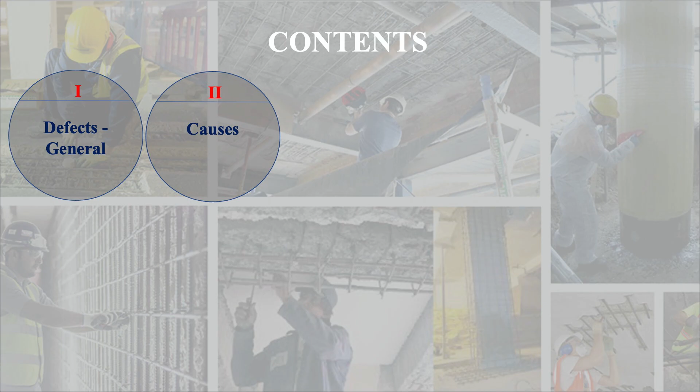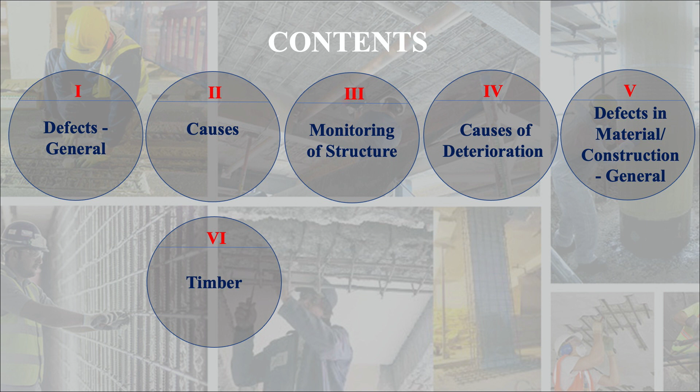The content of today's discussion includes defects in general, then causes of defects, then monitoring of structures, then causes of deterioration, then defects in material and construction in general. We will discuss about timber, and finally we will discuss about defects in iron and steel.

Learning outcomes of this module are: after going through this lecture, you must be able to identify defects in general in building construction, also to describe the defects of timber, and you should be able to describe the defects of steel. So let us begin with the introduction of defects and the remedial measures.

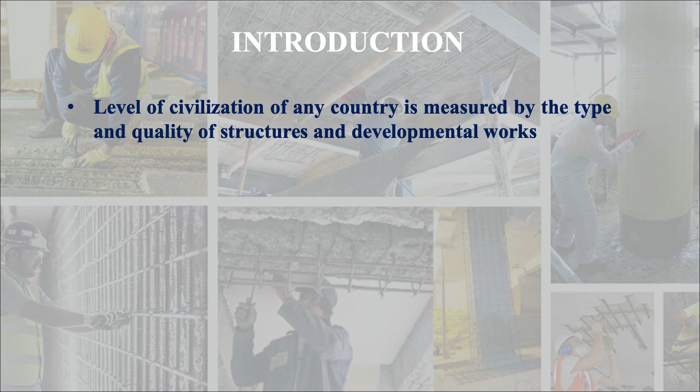The level of civilization of any country is measured by the type and quality of structures and developmental works put up there. The construction activity is mainly in the hands of civil engineers to build structures without flaws. It should be your determination to ensure defect-free construction.

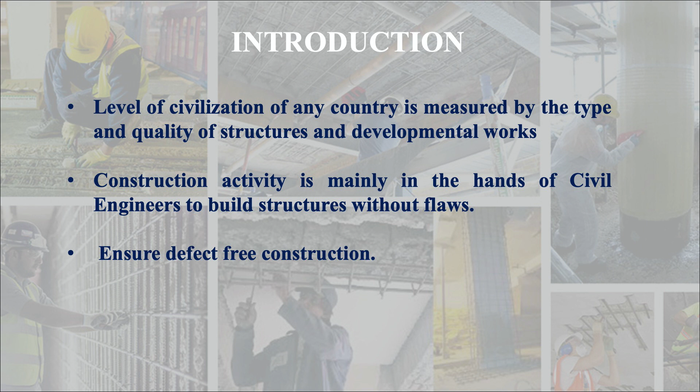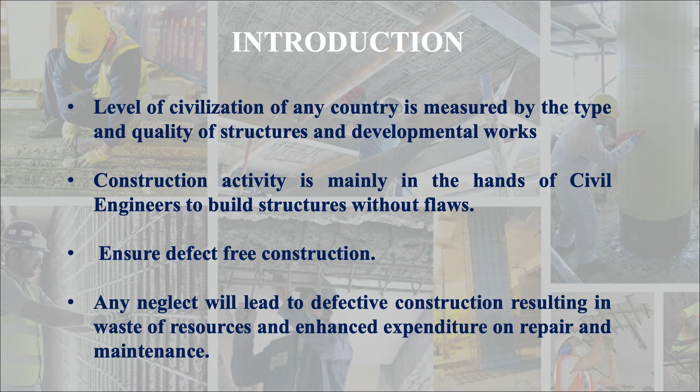Any neglect will lead to defective construction, resulting in waste of resources as well as enhanced expenditure on repair and maintenance. Because if defective construction is done, then it will require huge amount for their repair and maintenance.

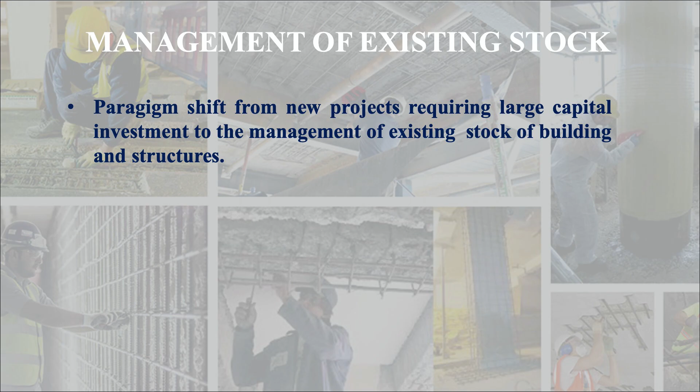Then how we should manage our existing stock? There is a paradigm shift from new projects requiring large capital investment to the management of existing stock of buildings and structures. In that sense, the recession has come as a blessing to establish the importance of management tasks of inspection, assessment, maintenance and repair.

Because if these four management tasks are done properly, then we can have a good quality of construction, as well as we can repair and maintain buildings for a longer life of the structure.

What are these four? These are: inspection, meaning the structures or buildings have to be inspected frequently, whether there is any damage or deterioration of the building. Then we have to assess what deterioration or damage has been done to the structure, then how we can maintain it and how we can repair it. So these are the four important management tasks.

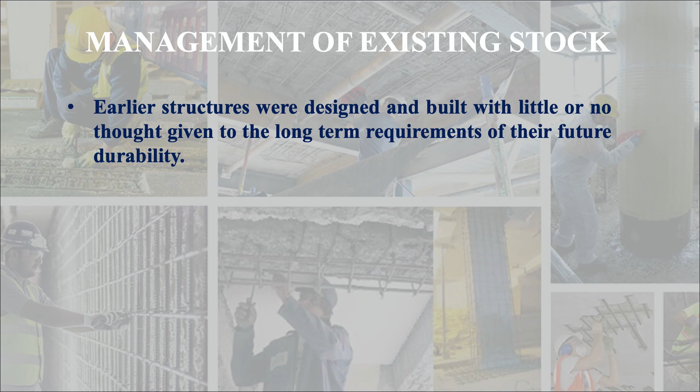Earlier, generally structures were designed and built with little or no thought given to the long-term requirement of their future durability. Meaning either we were focused for a short period that we have to construct a building or a structure, but how durable it will be for a long future use, it was not considered generally.

Now the view has changed and construction management is given the prominence it deserves. Because by following the principles of construction management, we can construct a good quality infrastructure with less cost, with less time, and overall expenditure certainly will be within a certain limit or range. Meaning the construction will be economical.

And when the quality is good, you need not to go for frequent repairs. So that way also we will be saving on cost.

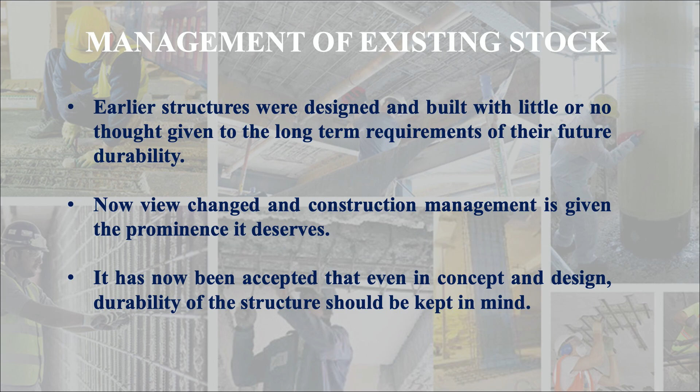It has now been accepted that even in concept and design, durability of structure should be kept in mind. Meaning that durability is not a factor which has to be considered at the time of construction only. When you are planning a building, when you are designing a building, durability should be taken into consideration at that time also. Whether the concept and plan of a building is durable, whether the design will lead to a durable structure, these have to be considered.

Now, construction management is the framework necessary to ensure a rational overall quality of any structure from conception to the end of its nominal life and beyond. So you can see from that what is the role and importance of construction management, that it is basically responsible for overall quality of any structure since conception to the end of its nominal life. So that way construction management is a very important aspect in construction.

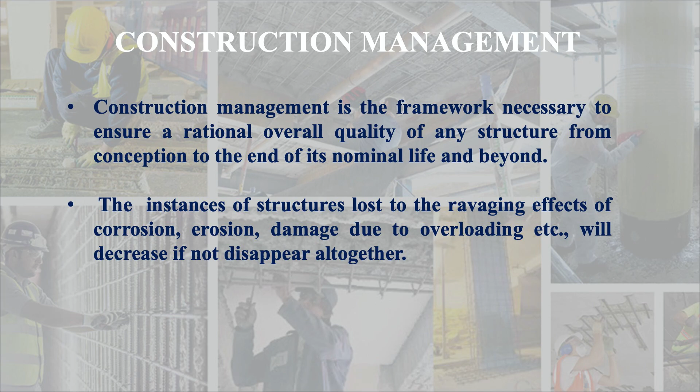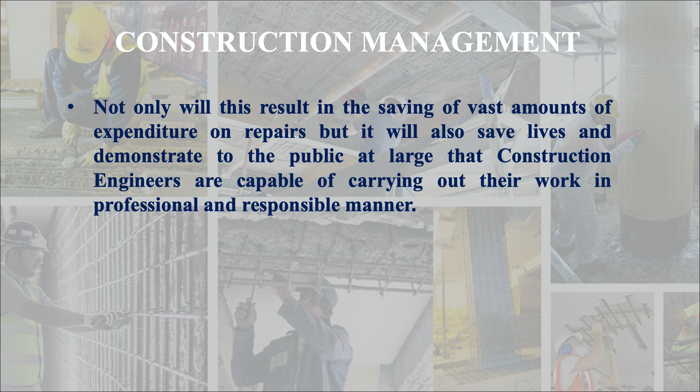The instances of structures lost to the ravaging effects of corrosion, erosion, damage due to overloading, etc. will decrease if not disappear altogether, if we follow the principles of construction management. Not only will this result in the saving of vast amounts of expenditure on repairs, but it will also save lives and demonstrate to the public at large that construction engineers are capable of carrying out their work in a professional and responsible manner. So that is the importance of following the principles of construction.

We move to inspection, assessment, maintenance and repair. These four words I told you earlier.

So the aim is to avoid defects in the entire construction process, starting from planning to the end of the life of the structure. For that, we have to follow these four steps religiously. During this discussion, you will come to know about possible defects at all stages of the construction program, the causes that give rise to the defects, and also appropriate ways for carrying out repairs.

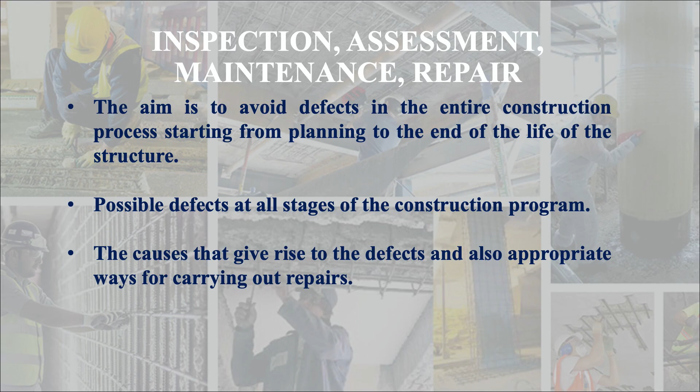Now let us begin with assessment of present condition, that is, how we can assess the present condition of the building.

Inspection and condition assessment are now well practiced sciences, but strength assessment based on design philosophy and theory has shown in many cases to underestimate the real strength of a structure, and greater understanding is essential in this area to ensure that structures are not condemned unnecessarily. Sometimes a wrong assessment will lead to condemning a strong or healthy building unnecessarily, which is an economic loss.

Assessment techniques applied in the field to determine actual working stresses also need development, not only to test our theories but also to ensure that realistic estimates are made of the future useful life of the structure. Sound strengthening techniques need to be developed and implemented in an economical manner.

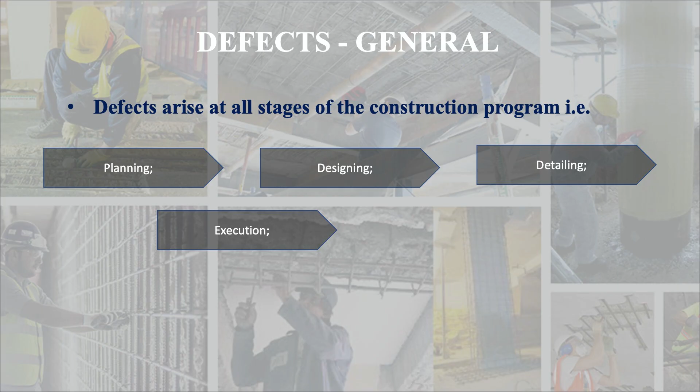Now let's see what are defects and at what stages these defects come into the building. Defects arise at all stages of the construction program, that is, planning, designing, detailing, execution and maintenance. So at all stages, defects may creep into our structure if we are not careful.

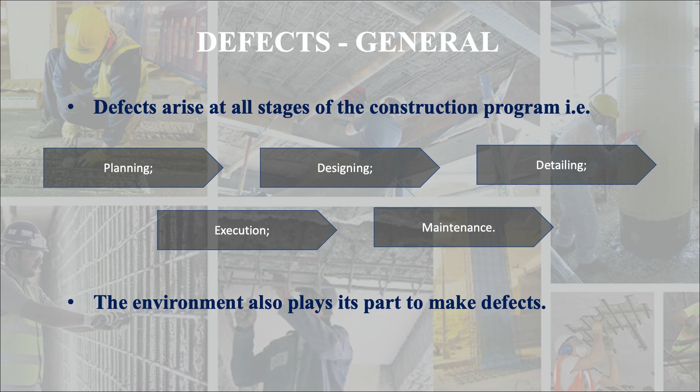The environment also plays its part in making defects. Now, these structures which we have built are exposed to environmental agents, and these environmental agents, when they act on the structures, cause defects in the building itself and in the building material.

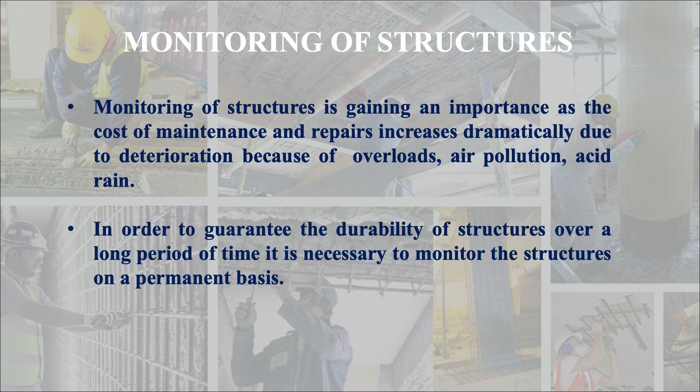Now, monitoring of structures is gaining importance as the cost of maintenance and repairs increases dramatically due to deterioration because of overloads, air pollution, acid rain, etc. In order to guarantee the durability of structures over a long period of time, it is necessary to monitor the structures on a permanent basis.

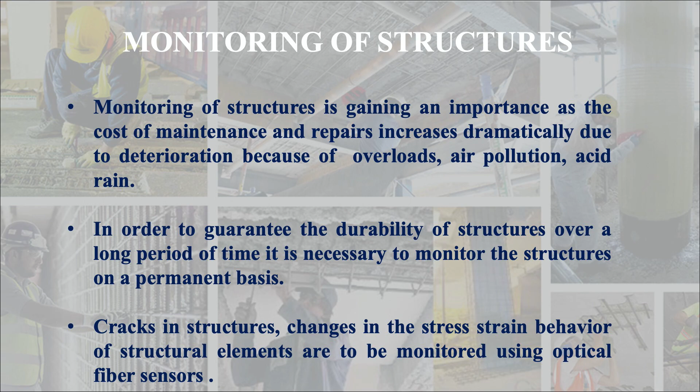Monitoring is a very important aspect. Cracks in structures, changes in stress-strain behavior of structural elements are to be monitored using optical fiber sensors. This is one method or technique to monitor cracks in the structure and changes in stress-strain behavior of structural elements, so that we can monitor the behavior of the structure over the period of time.

Now there are various tests to find the remaining strength and also the defects in the structure. One of the methods is non-destructive tests. As is clear from the name, we are not going to demolish or damage any part of the structure, and without disturbing any element of the structure, we carry out these tests. That's why it is called non-destructive testing.

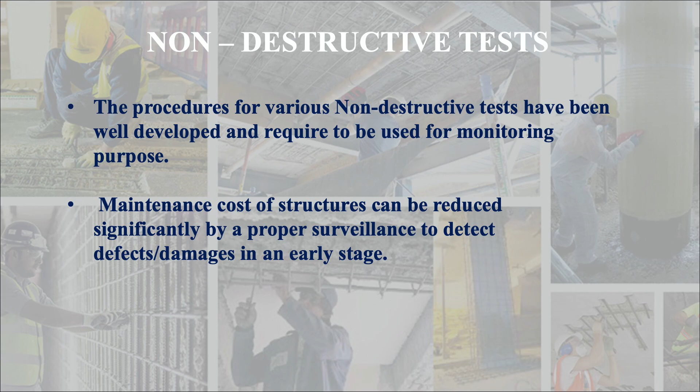So the procedures for various non-destructive tests have been well developed and are required to be used for monitoring purposes. The maintenance cost of structures can be reduced significantly by proper surveillance to detect defects or damages at an early stage. If by way of proper monitoring we can detect any defect or damage at an early stage, then we can deal with it and fix that damage or defect easily and with less cost.

Because at a later stage, the cost will go on increasing, and at that time the money spent will be too much, or this may also lead to a situation where it is not repairable and we have to remove that structural element or some part of the structure to save the rest of the structure and strengthen it. By removing it, we mean not only removing, but constructing a new strong element in place of the weak element.

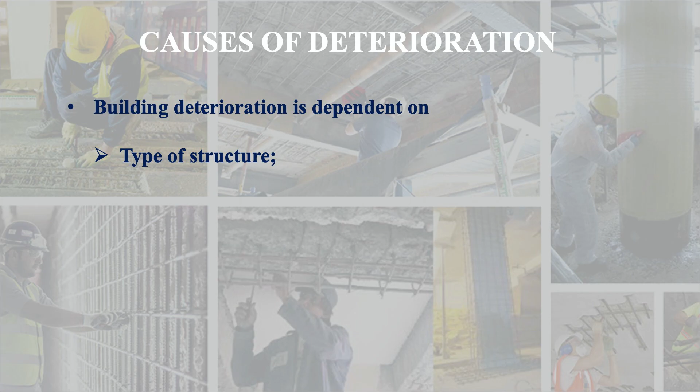Now, causes of deterioration. Building deterioration depends first on the type of structure, how it was designed and detailed, that is, the design and detailing of the structure, then how it was constructed, meaning the construction method and techniques, then how it was maintained over a period of time, whether any maintenance work was done or not.

If maintenance was done, then what material and what methods were used. Then its environment, in which environment that building is located, whether it is exposed to some acidic gases or acidic environment, whether there is a lot of rain, or whether temperature variation is too much, because all these things affect the buildings.

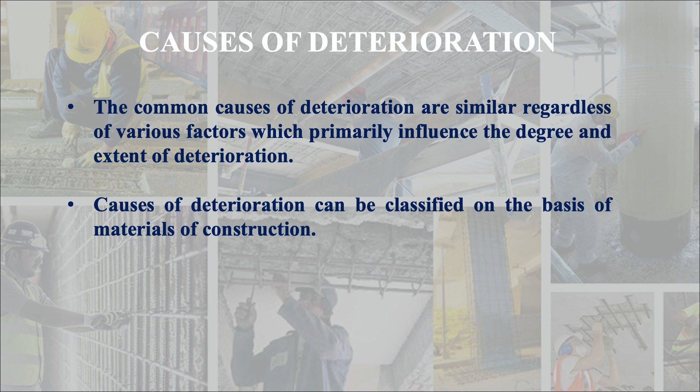The common causes of deterioration are similar regardless of various factors which primarily influence the degree and extent of deterioration. Causes of deterioration can be classified on the basis of materials of construction. So let us begin with the material timber.

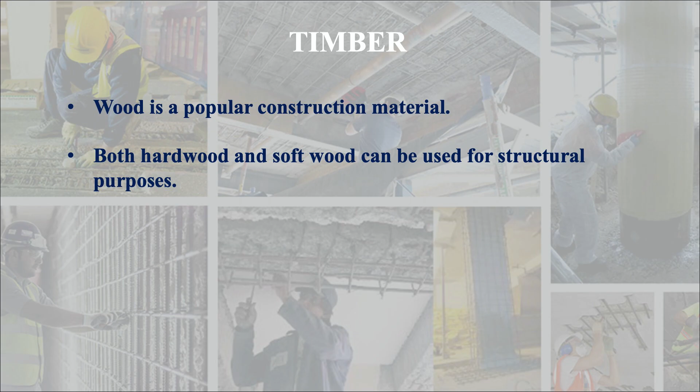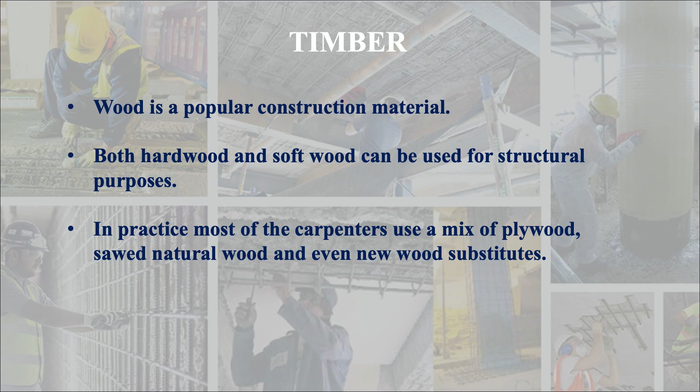Wood is a popular construction material. Both hardwood and softwood can be used for structural purposes. In practice, most of today's carpenters use a mix of plywood, sawed natural wood, and even new wood substitutes which are available in the market. Means there are certain substitutes, wood substitutes, which can be used in place of natural wood.

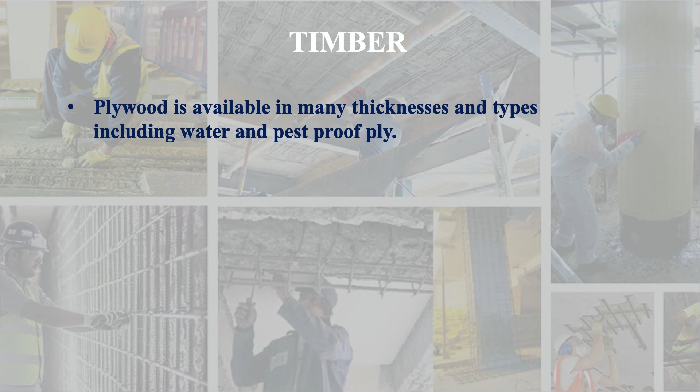Plywood is available in many thicknesses and types, including water and pest proof ply, meaning the ply which shows no effect when exposed to water or pest attack. Along with ply, you could use laminates like Formica, Sunmica, or wood veneer, which has the finish of a natural wood.

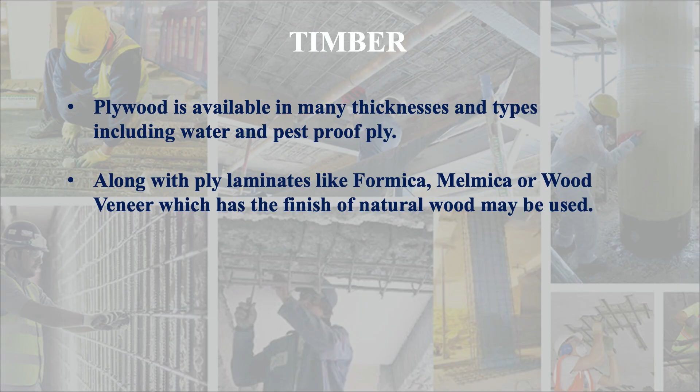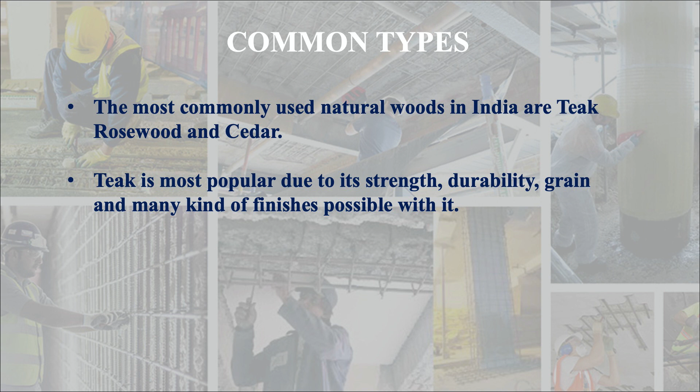Now, what are the common types of timber used in structures? The most commonly used natural wood in India are teak, rosewood and cedar. Teak is most popular due to its strength, durability, grain and the many kinds of finishes possible with it. These are the advantages why teak is preferred.

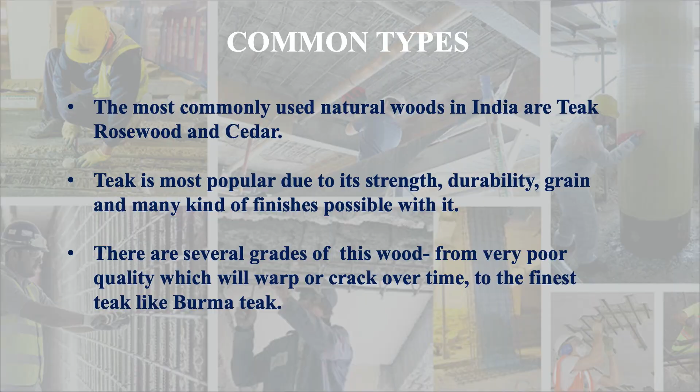But when buying teak, you should know that there are several grades of this wood, from very poor quality which will warp or crack over time, meaning these defects may come into the picture, to the finest teak like Burma teak. There are a variety of teaks.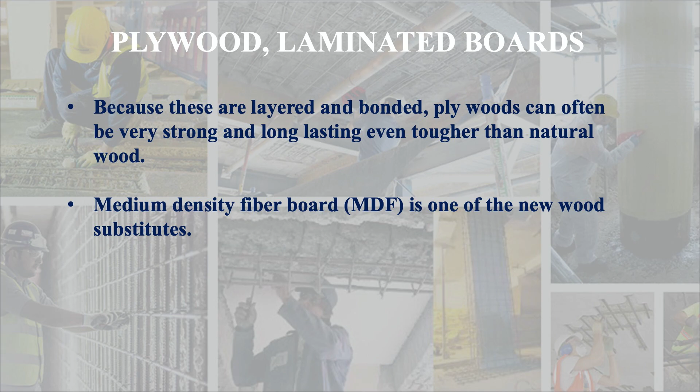Medium density fiber board, generally called MDF, is one of the new wood substitutes. For the home, it can be used for doors, windows, even for paneling, floors and ceilings. An exterior grade variety of MDF is designed to withstand humidity. You can even get MDF with lamination on one side or both.

Wood substitutes can have many plus points. What are these plus points? It is durable, and it is fire, termite, moisture and sound resistant. So these are the advantages.

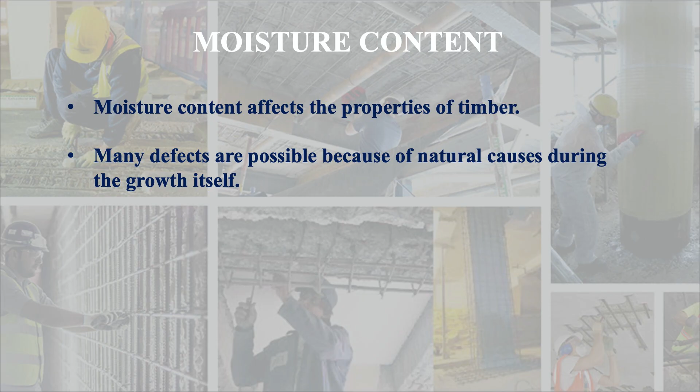Now let us see how moisture content affects the properties of timber. Many defects are possible because of natural causes during the growth itself, meaning when the tree is growing, some defects may come into the picture at that time also.

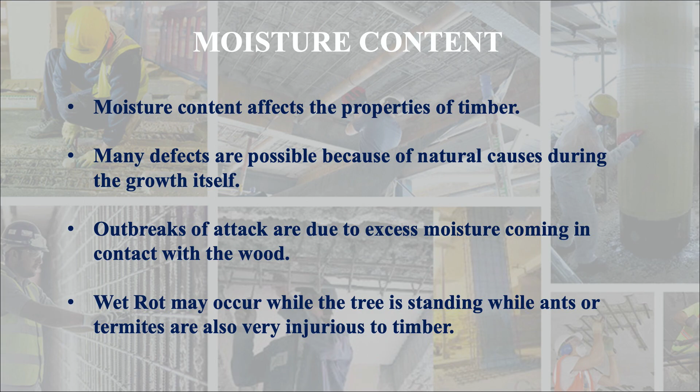Outbreaks of attacks are nearly always due to excess moisture coming in contact with the wood, causing lot many problems. One such problem is wet rot, which may occur while the tree is standing, while ants or termites are also very injurious to the timber.

In addition to wet rot, these are also injurious to the timber. Teak, sal and deodar withstand the attack of white ants. Now, what can we do to deal with the moisture? The answer is seasoning. Seasoning is limiting the moisture content.

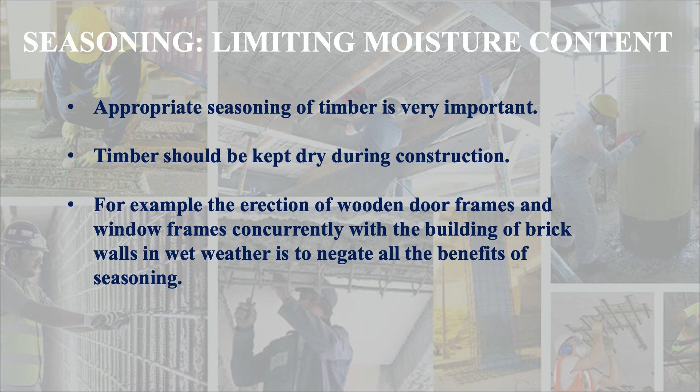So, appropriate seasoning is very important to make the timber strong. Timber should be kept dry during construction. For example, the erection of wood door frames and window frames concurrently with the building of brick walls in wet weather negates all the benefits of seasoning. Means if you are doing this work concurrently, especially in wet weather, the seasoning of the timber will be affected.

The construction should be such as to protect the timber from damp during the life of the building. All timber should be protected from ground moisture by providing damp-proof courses, meaning moisture should not go from ground to the timber. For that purpose, we use damp proof courses, where floorboards on ground floors are fixed to sleepers laid on concrete or wood blocks.

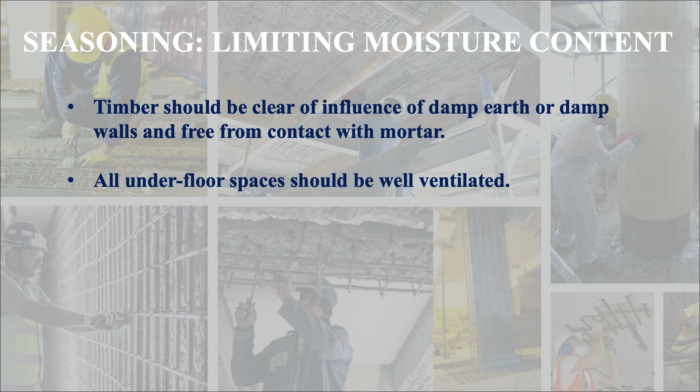A layer of asphalt or bituminous mastic should be provided in between, so that you can check the ingress of moisture into the wood or timber. Timber should be clear of the influence of damp earth or damp walls and free from contact with mortar. All underfloor spaces should be well ventilated, because proper ventilation minimizes the presence of moisture.

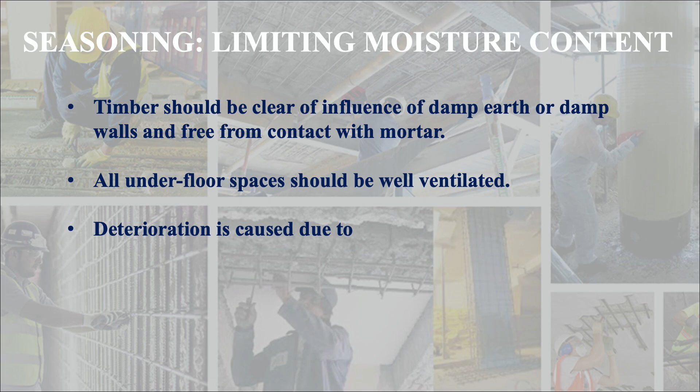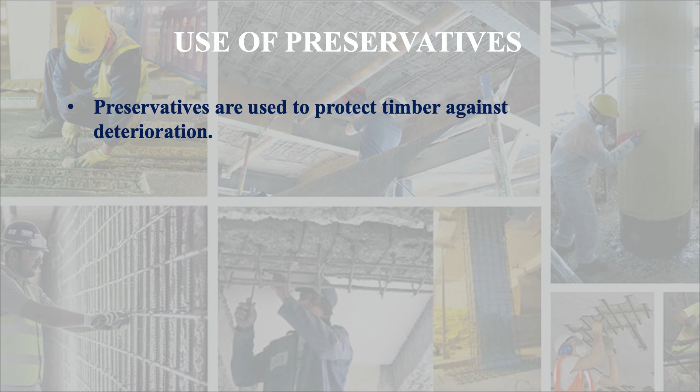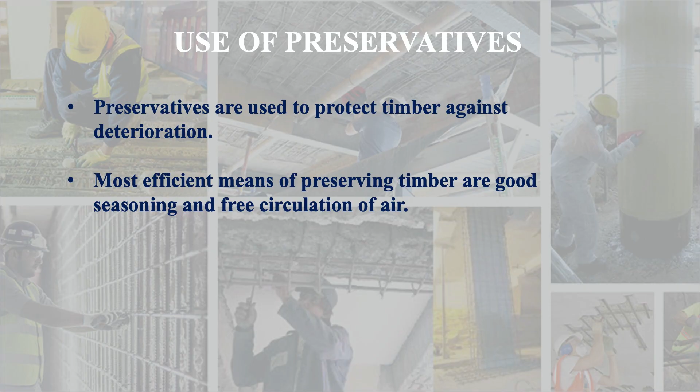Deterioration is caused due to fungi, attacks of termites, borers, and marine organisms. These are the agents which cause deterioration in timber. Now we can safeguard the timber and increase its life by using preservatives, which protect timber against deterioration. The most efficient means of preserving timber are good seasoning and free circulation of air, which together can easily protect the timber. Protection against moisture is also afforded by oil paints, provided that the timber is perfectly dry when first painted.

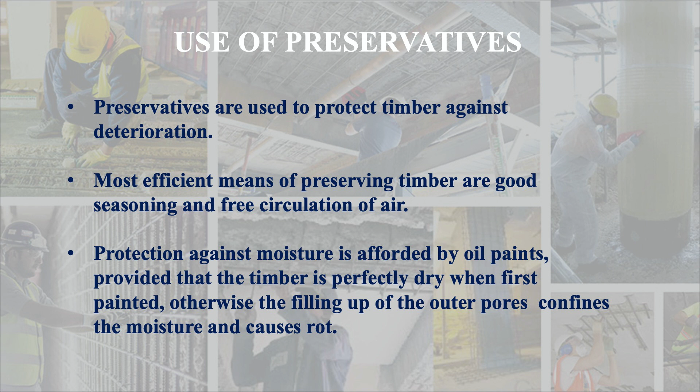When you are painting timber for the first time, the timber should be in dry condition. Otherwise, the filling up of the outer pores confines the moisture within it and causes rot. This is the importance of ensuring the timber is dry before first painting, not wet or containing moisture.

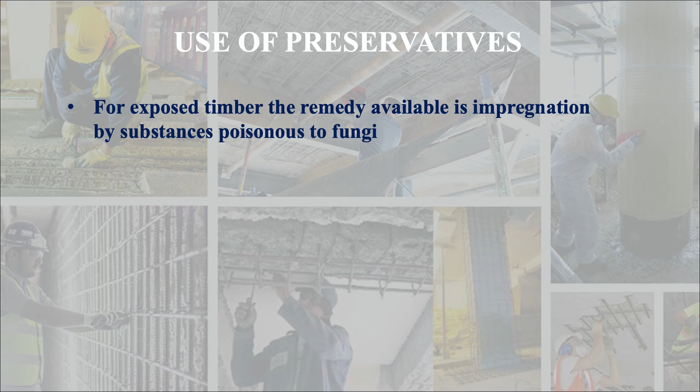For exposed timber, the remedy available is impregnation by substances poisonous to fungi. If you impregnate the timber with these poisonous substances, you can protect the timber from fungi. These substances are either of oil or chemical type.

Now let us see what common preservatives are available. Commonly used preservatives are oil type, examples being coal tar creosote. Chemical type organic solvents are also used as preservatives, such as naphtha, kerosene, and white spirit.

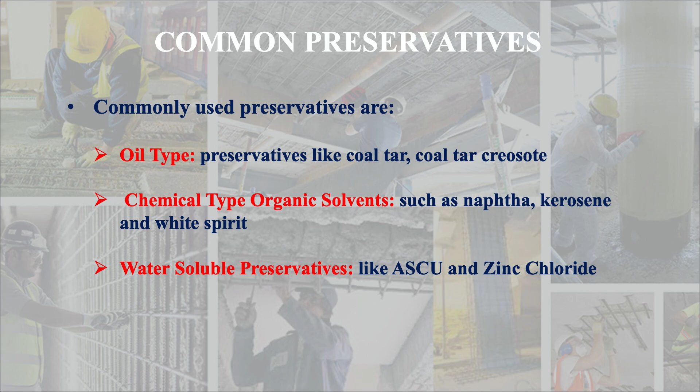Then there are water soluble preservatives like ASCU and zinc chloride. Other types of preservatives are waterborne salt types, and in this category the most common are copper, chromium, or arsenic salt, simply called CCA, which are applied by pressure.

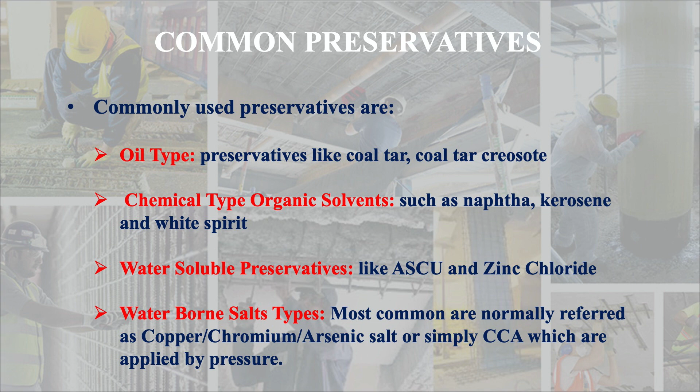Now, inspection of timber - how do you do it? Inspection of timber is carried out by experienced staff using visual and hammer testing, which can be done to inspect the health or state of the timber.

Then ultrasonic testing with PURL, which is portable ultrasonic rot locator. With this method you can locate rot, whether rot is there inside the timber or not.

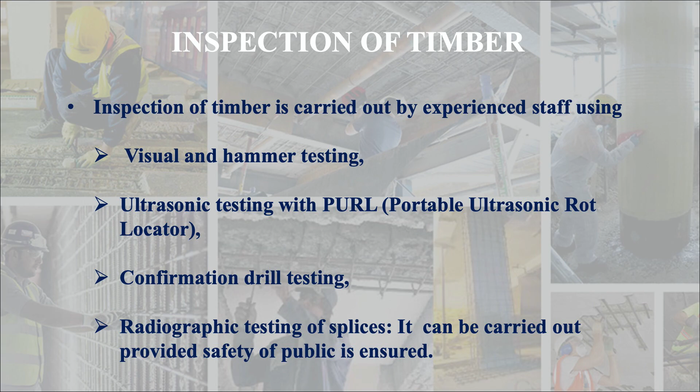Then confirmation drill testing can be done. Then radiographic testing of splices can be carried out, provided safety of the public is ensured, because here you are using radiation, so you must ensure public safety while doing this test.

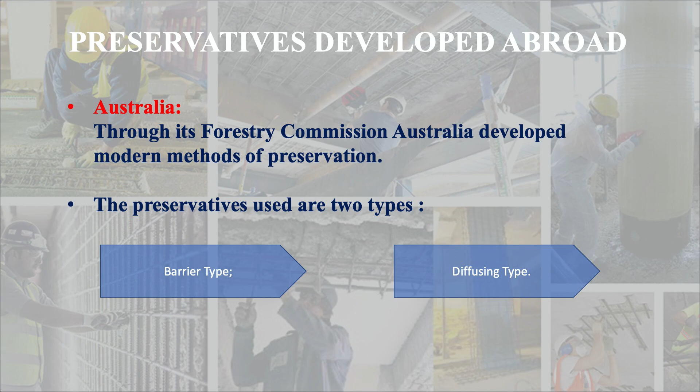There are preservatives developed abroad, like in Australia through its Forestry Commission, which developed modern methods of preservation. There are two types: barrier type and diffusing type. Barrier type are generally copper based oils which may be applied by brush, spray, or in emulsion form, and its name comes from the fact that it creates a barrier between the timber and deteriorating agents.

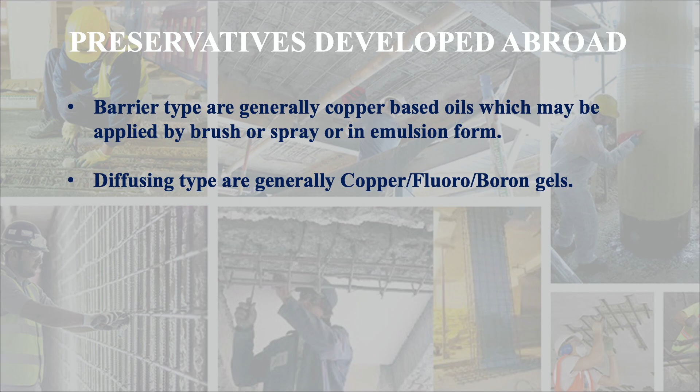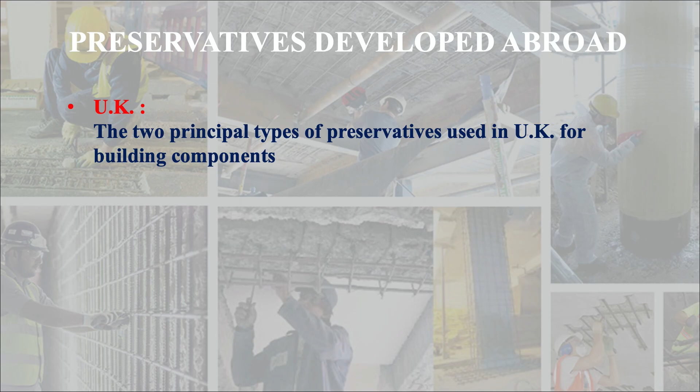Then second is diffusing type. These are generally copper, fluoro, or boron gels, and they protect timber by the action of diffusion into the timber. Then in the UK, two principal types of preservatives are used for building components.

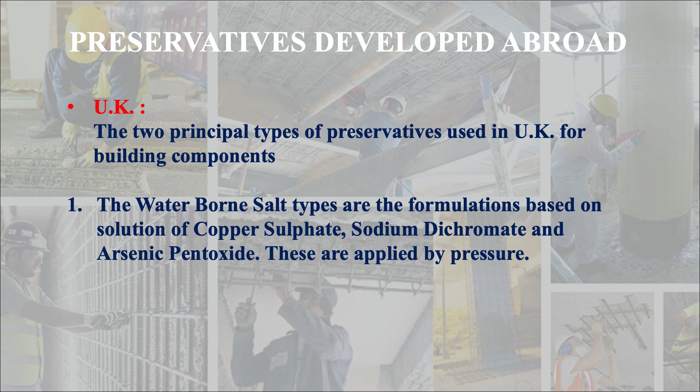One is the waterborne salt type. These are formulations based on solution of copper sulfate, sodium dichromate, and arsenic pentoxide. These are applied by pressure.

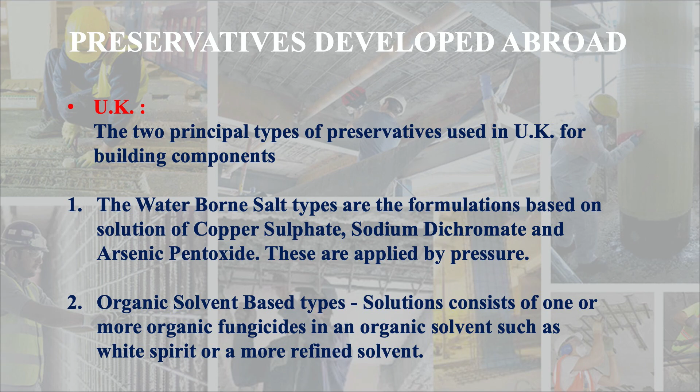The other type is organic solvent based types. Solutions consist of one or more organic fungicides in an organic solvent such as white spirit, or a more refined solvent can be used. Common fungicides are...

pentachlorophenol, tributyltin oxide, zinc naphthenate, and pentachlorophenyl laurate. These are the common fungicides used to protect timber.

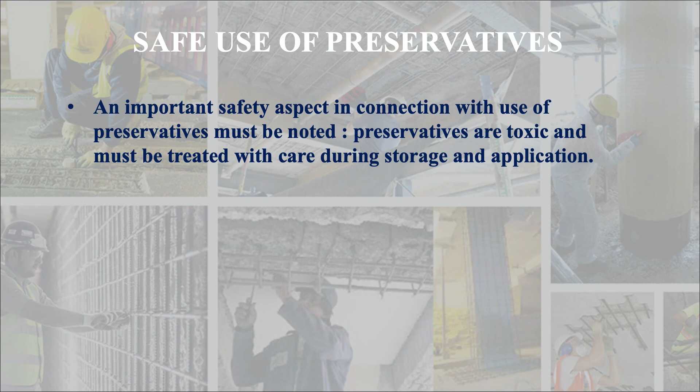Now, while doing preservation, one has to be very careful. An important safety aspect in connection with the use of preservatives must be noted: preservatives are toxic and must be treated with care during storage and application.

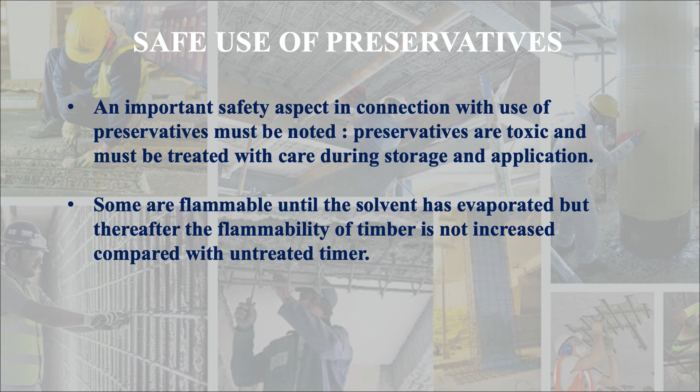Some preservatives are flammable until the solvent has evaporated, because until the solvent has evaporated, these are flammable, as the solvent itself is flammable. But after evaporation of the solvent, the flammability of the timber is not increased compared with untreated timber, since untreated timber itself is flammable. So this ensures that after application of preservatives, flammability of timber is not increased.

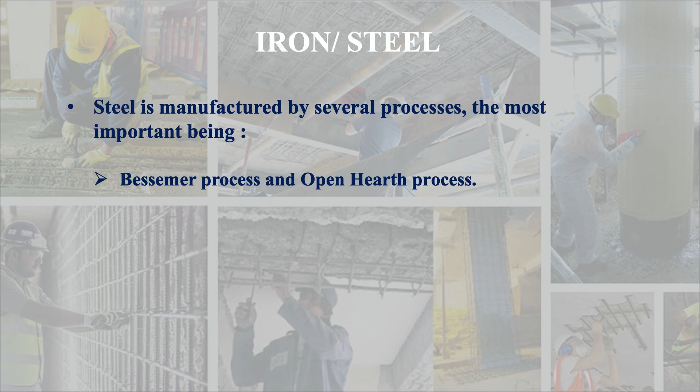Now let us see another material: iron or steel. Steel is manufactured by several processes, the most important being the Bessemer process and open hearth process. The steel thus made is converted into steel objects and sections by the process of casting, rolling, forging, or processing. Various objects are formed or created from steel.

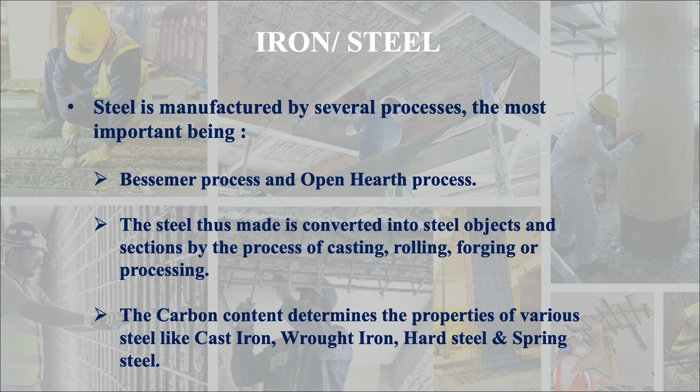The carbon content in the steel determines the properties of various types of steel, like cast iron, wrought iron, hard steel, spring steel. The properties of these different steels vary, and to a great extent these properties are affected by the carbon content in the steel.

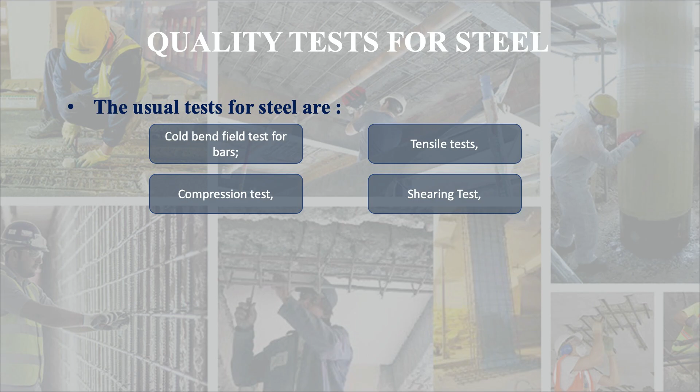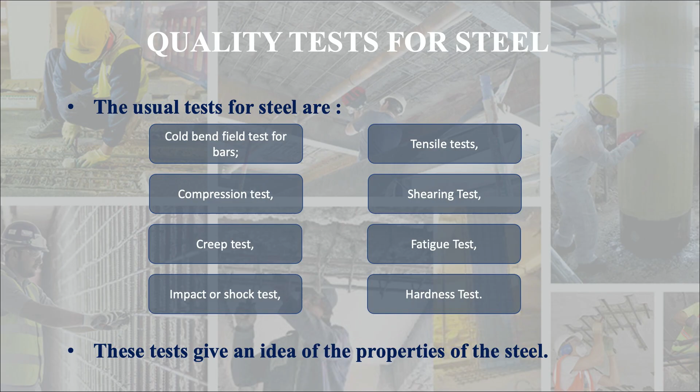Now, what are the quality tests for steel? The usual tests for steel are cold bend field test for bars, tensile test, compression test, shearing test, creep test, fatigue test, impact or shock test, and hardness test. These tests give an idea of the properties of the steel.

Now let us see what are alloys.

Now we will be focusing on different alloys, basically the steel alloys. Alloying elements like nickel, vanadium, chromium, carbon, manganese, silicon, tungsten, copper, etc. are used to manufacture various improved types with specific properties like chrome steel, chrome nickel steel, stainless steel, tool steel, and high speed steel. So these are steel alloys.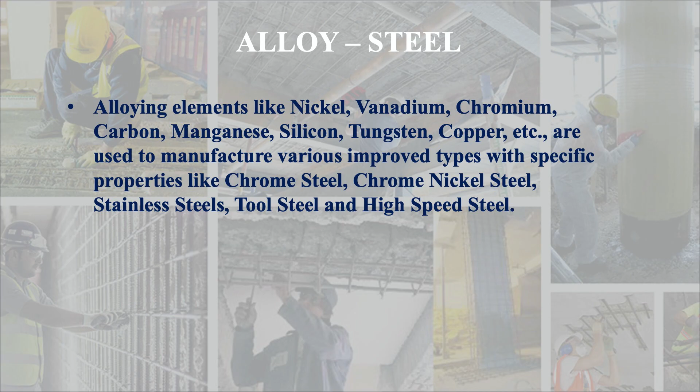Now let us see what are the defects in steel reinforcement. The most important defect in steel reinforcement is corrosion. Corrosion is the most important defect in reinforcing steel.

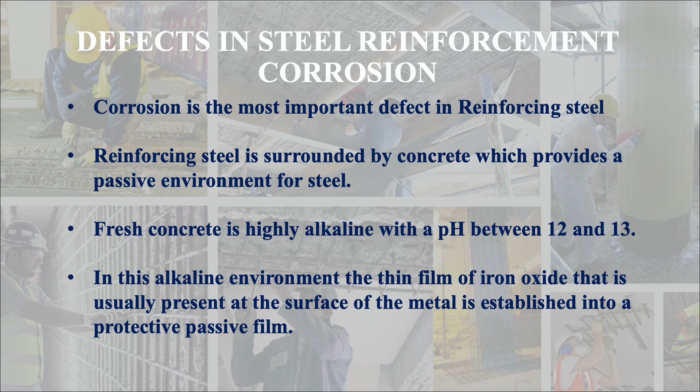The reinforcing steel is surrounded by concrete, which provides a passive environment for steel. Fresh concrete is highly alkaline with a pH between 12 and 13. In this alkaline environment, the thin film of iron oxide usually present at the surface of the metal is established into a protective passive film. This passive film protects the reinforcing steel against corrosion.

In addition, well-cured concrete of low water cement ratio has low permeability, which minimizes penetration of corrosion inducing solutions. The low permeability also increases the electrical resistivity of the concrete, which assists in reducing the rate of corrosion by retarding flow of electrical currents that accompany electrochemical corrosion.

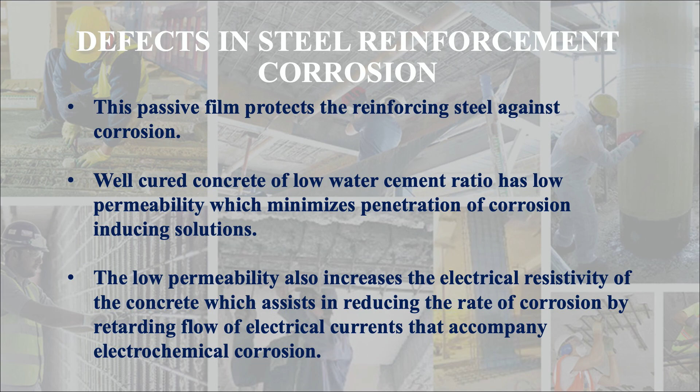Corrosion of reinforcing steel is electrochemical degradation of steel. It occurs whenever the protective passive film is destroyed by either carbonation or by the presence of more than threshold concentration of chloride ions at the steel surface, in the presence of oxygen and moisture.

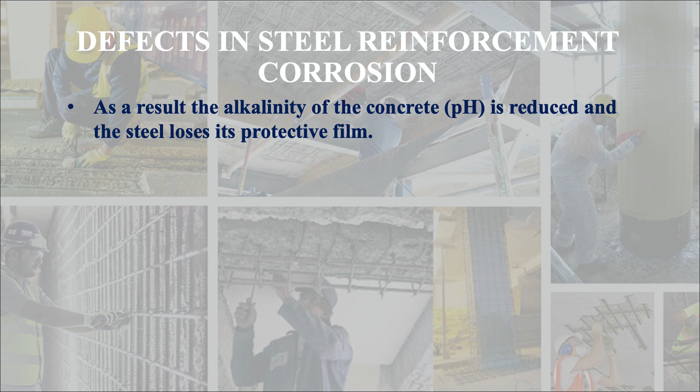Carbonation is the result of the reaction of carbon dioxide and other acidic gases in the air with the alkaline constituents of cement paste. As a result, the alkalinity of concrete, meaning the pH we generally measure, is reduced and the steel loses its protective film.

Chloride ions can also penetrate the protective passive film, with an accompanying shift in steel potential, and subject the steel to the action of oxygen and moisture, resulting in corrosion. So that way also steel corrosion may occur.

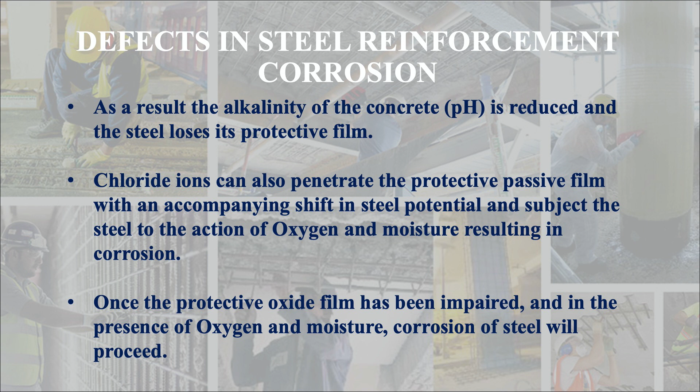Once the protective oxide film has been impaired, in the presence of oxygen and moisture, corrosion of steel will proceed. There are two mechanisms in steel corrosion: one is electrochemical corrosion and another is galvanic corrosion.

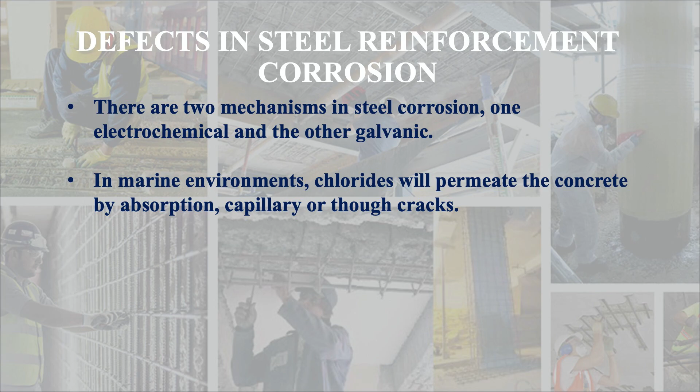In marine environment, chlorides will permeate the concrete by absorption, capillary action, or through cracks. These chlorides, in presence of oxygen and moisture, may provide an acidic pH in an otherwise alkaline environment. Because we saw that in concrete the environment is alkaline, but here these chlorides are causing the acidic pH.

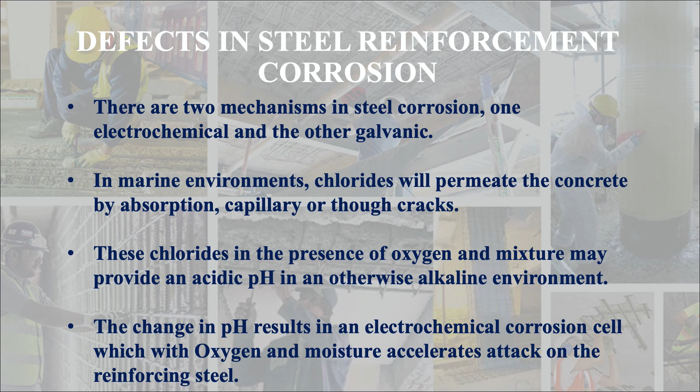The change in pH results in an electrochemical corrosion cell, which with oxygen and moisture accelerates attack on the reinforcing steel. Corrosion products from the attacked steel create expansive forces, meaning expansion takes place. Why does this happen? Because the volume of steel increases 6 times on corrosion. So that way it expands within the concrete, causing the concrete to spall and crumble.

As the steel is further exposed to oxygen, because when cracks have come into the picture, the steel corrodes more and increases the deterioration of concrete in a progressive manner. In general, electrochemical corrosion triggers galvanic corrosion by exposing the reinforcing steel to water.

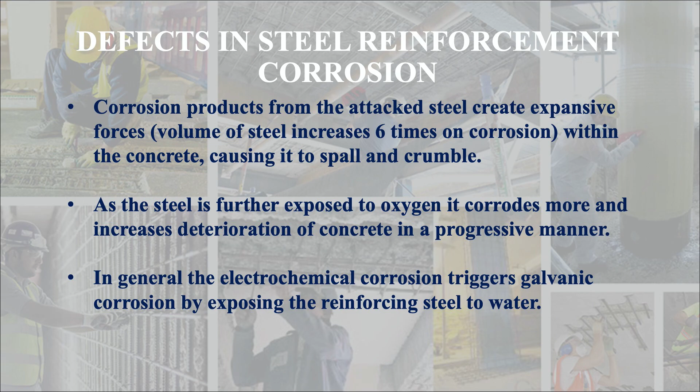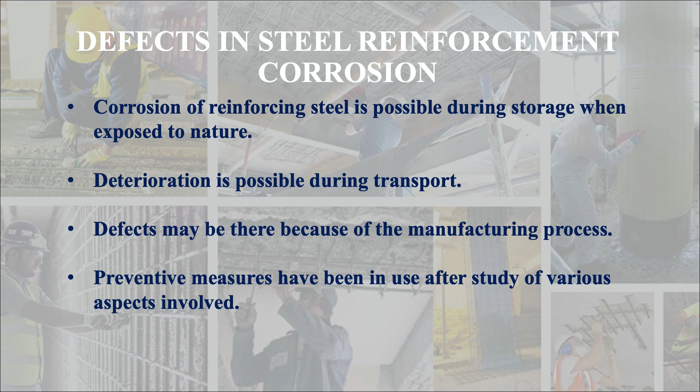Then preventive measures have been in use after a study of various aspects involved, and one is coatings to prevent corrosion have also been evolved, meaning you can provide coating to that. The best way of tackling corrosion of reinforcing steel in concrete is by use of quality concrete with minimum water cement ratio and ensuring full compaction to prevent entry of moisture. Because if you are able to prevent entry of moisture, then you can protect the reinforcing steel from corrosion.

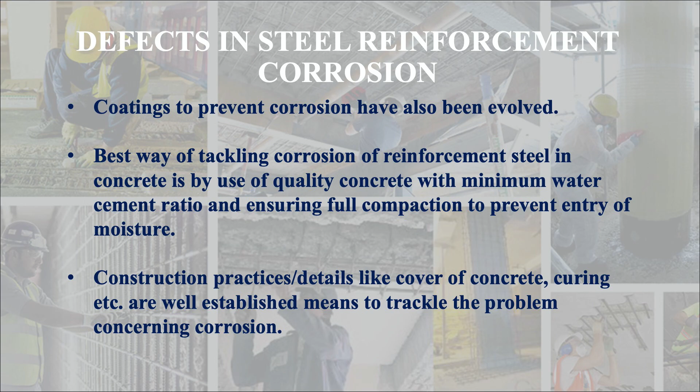The construction practices and details like cover of concrete, curing, etc. are well established means to tackle the problem concerning corrosion. The deterioration due to corrosion triggers deterioration in surrounding concrete. Although both materials have separate deterioration mechanisms, the deterioration of one affects the other.

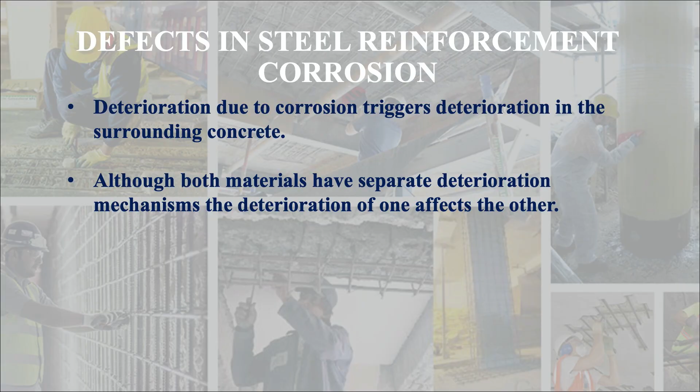So, in this lecture, we discussed many things about defects in general, and then about two materials, timber and steel. I hope you must have enjoyed it. Next, we will discuss other materials and defects in these materials. Thank you.